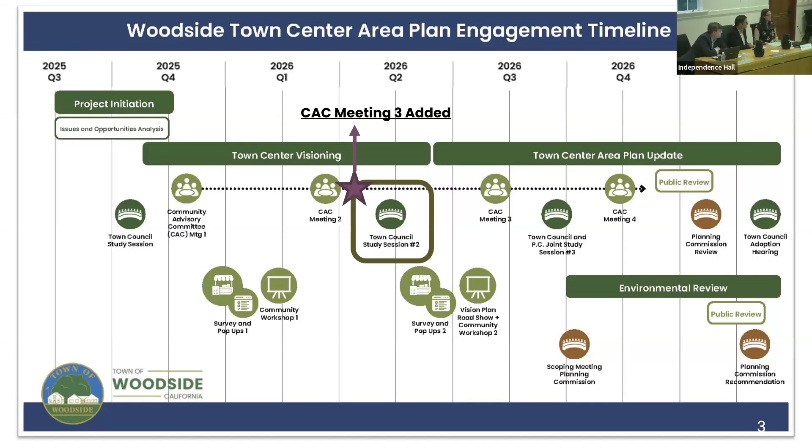So just quickly to start off, I'll lay out some of the policy context, just as a reminder that guides and informs our work on this update. And I'll restate some of the outcomes that we want to get out of this effort so that we're all moving in the same direction and aligned on what we want to achieve with this project.

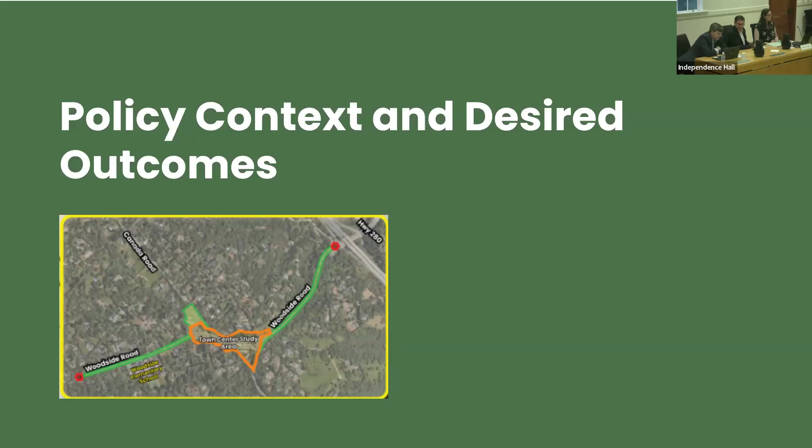Just as a reminder, you see here this image. At our first meeting, the council extended the boundary of the plan in both directions along Woodside Road from 280 on the eastern side all the way to Little Store on the western side. So that was one of the early moves by council to influence the direction of this plan.

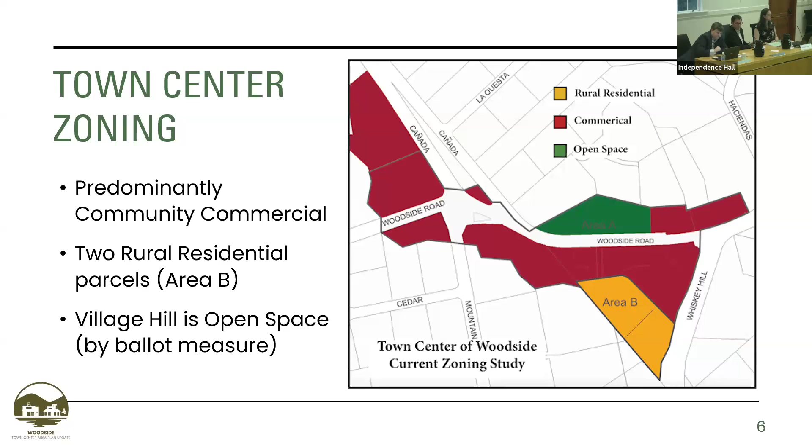Another important limitation that I think most of us are aware of, but it's worth restating, is Measure J, adopted in 1988, which limits building heights to 17 feet above the crown of the road within 100 feet from the edge of Woodside Road. You see that area represented in red here, and it covers essentially most of the privately owned portions of the town center.

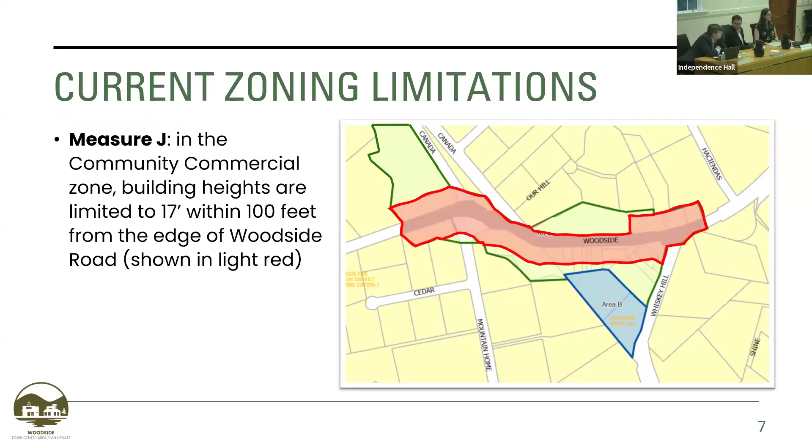Building consensus around a shared vision is very important to us, to come out of this effort with forward momentum around ideas we all agree on. Prioritizing the concerns of residents and local stakeholders over those of outside visitors, maintaining the rural, equestrian-centric, and small-town character—something that was repeated over and over through all of our engagement—and improving the safe movement through and around the town center for all different modes.

Facilitating seasonal outdoor dining, fostering a few additional public gathering spaces, improving the aesthetic appeal of the area, providing more guidance on the character and design we want to see in buildings in the town center, enabling the long-term economic success of local businesses, expanding the uses in the town center to better serve our needs, offering more flexibility to landowners, including exploring residential use, and finally enhancing the revenue generating capacity of the town center to help with the town's budget.

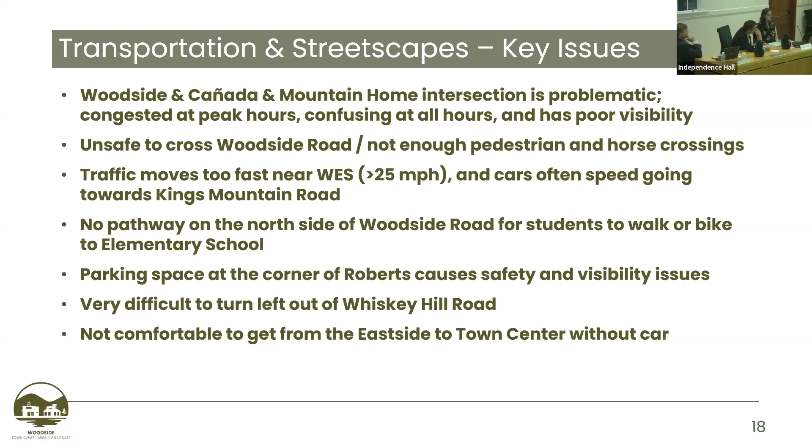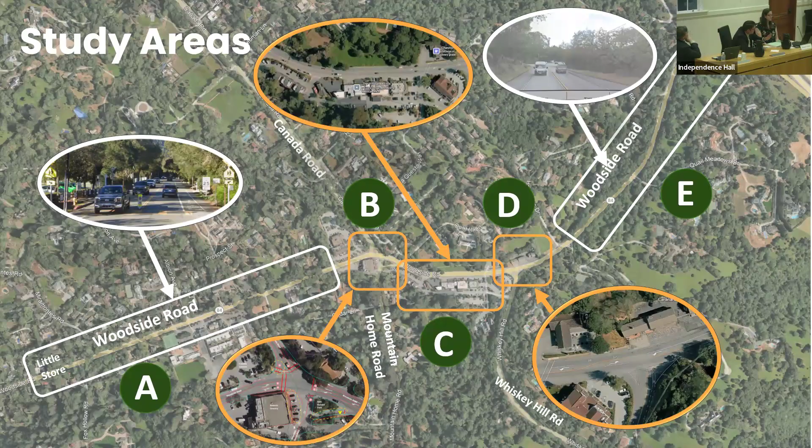So we organized our study areas from west to east, starting with Woodside Road from a little beyond Little Store into Roberts Grocery, then the intersection of Cañada and Woodside Road, then the central stretch of Woodside Road, the intersection at Whiskey Hill, and up to Woodside Road.

I was told you spent hours and hours poring over the slides, absorbing the concepts, so that I could be very brief tonight. So I will respect that and be very brief, and we can come back and have as much depth in the discussion as you would like.

So area A, which stretches from Little Store up to Robert's Grocery, has three concepts here, mostly to orient you to where these concepts happen. First is really, let's enhance the safety as much as possible around Woodside Elementary School.

The second concept looks at how we make the north side of Woodside Road more consistent, more pedestrian friendly, creating a pedestrian pathway on both sides, and also formalizing separated bike lanes on both sides of the travel lanes. There's a couple of spots where trees get in the way, but for the most part it's possible.

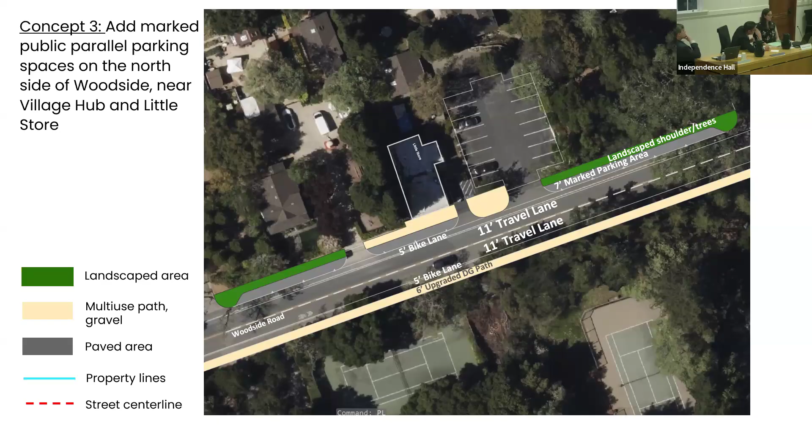So the CAC feedback was yes on concept one, as many traffic calming devices as we can do. The one thing not well received was speed bumps, but looking at speed tables carefully designed to take into consideration truck trailers, horse trailers and things like that is important. The north side multi-use path had support for the concept, but there's also acknowledgement that the drainage and irregular conditions there might make that very expensive and difficult to achieve, so looking at that block by block, but that was more lukewarm.

And concept three, getting absolute clarity on where you can park and where you can't, was well received. So I thought we'd stop there and hear your thoughts before we go into the next section.

Awesome. Thank you. Any questions from council on area A?

I'd like to understand what experience other communities you've worked with have had with changes pre- and post-implementation of programs in pedestrian and bicycle usage downtown or in the area you're working in. We have a lot of presumptions here that we're going to build all these bike paths and walking paths, and I'd like to understand how many people will really use those.

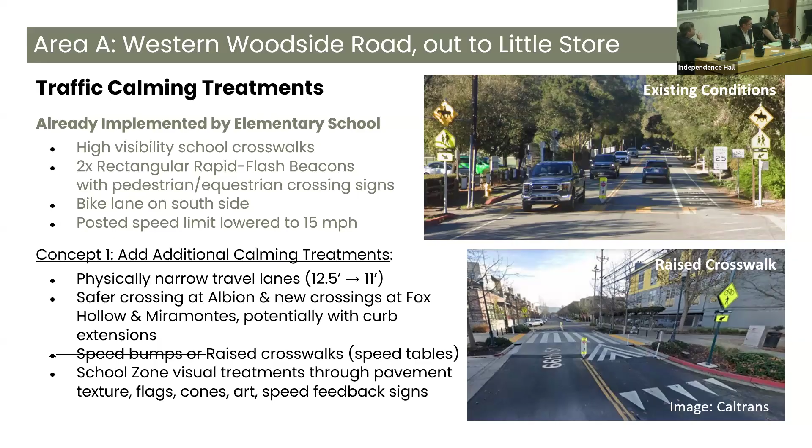I also had a question about Concept 2. It sounds like that was met with some lukewarm support, but some concerns about the cost. I think on one of the slides it indicated more diligence was needed, and I know the Circulation Committee has also looked into this and was doing more diligence on the costs. Is that diligence now being done, and is it being facilitated in any way by your firm?

That's not really in our scope to do that level of detail. I think what we can do is maybe take a stab at a high-level cost, but we're not going to be able to get in and do a level of detail analysis that you would need to really know tree by tree. But one of the recommendations that could come out of this effort is to do exactly that.

To do another, more detailed look at it. I think this process is more going to establish the policy direction of whether or not we want to do a certain facility intervention, in this case a trail or bike lane. So here we would establish the direction, and then there would be an additional effort to do some surveying, because it would require detailed looking at where property lines and utilities are. The utilities and drainage are where there would be some challenges, but we could come up with conceptual direction and design in this process, with follow-up needed.

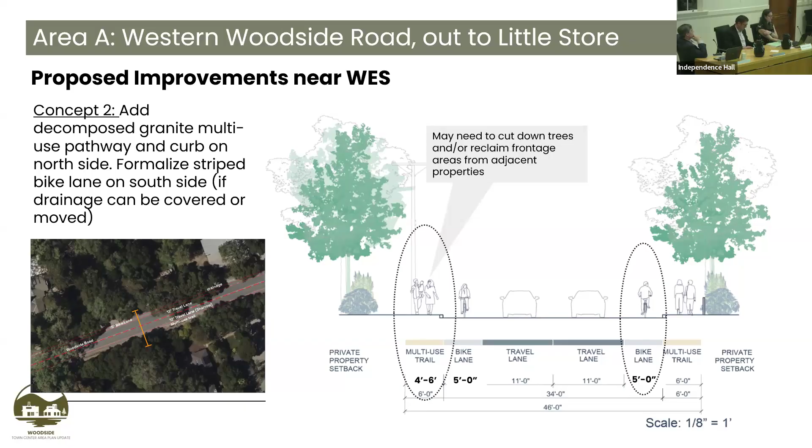Right, I think with that, we will open up public comment on Area A. Does anybody have a public comment that they would like to make on this issue? A lot of people are here for parking.

Hello, Steve Lubin. Surprise, surprise. I think really there's an issue of space. I think it would be great to have the sidewalk on the north side, but if there's enough room to put bike lanes on both sides, then I think it makes sense to put the sidewalks on both sides, but I'm not sure there is everywhere.

And I have, from at least the part from the school to Roberts, I think it's limited enough so that if you have good bike lanes, there just isn't enough room, and it takes actually less room to have a shared path, like Troy was talking about. That's a shared two-way path. The state and federal standard is 12 feet wide.

What we have there is 5 feet now. And so we end up with really a dangerous situation for kids, especially in the afternoon, heading from the school to the store. The kids will ride their bikes and come up to pedestrians and then veer out into the traffic. That isn't as dangerous eastbound because the cars are going slow. If that were replicated in the other direction, I think it would be really dangerous because the bicycles are going uphill and going slower.

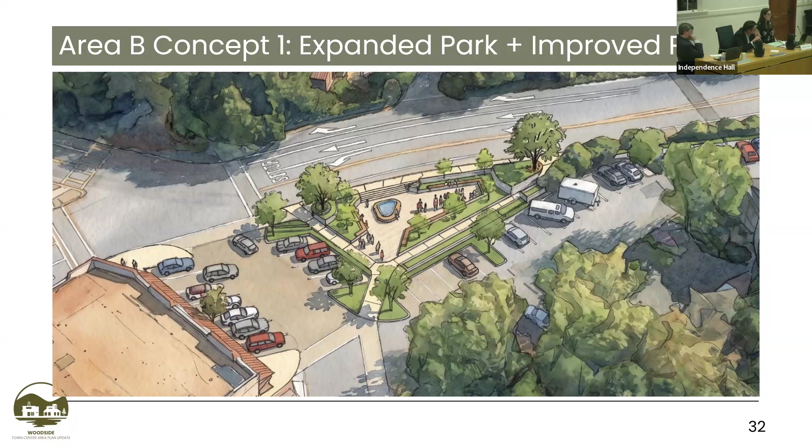Again, exploratory process. This was a concept where we relocated the on-street parking over to where Alec Donald Park is currently. So essentially moving the park next to Robert's Grocery and moving the parking over there. The idea was to have free flow of traffic, but of course, getting your carts and other things over there is extremely problematic. Next slide.

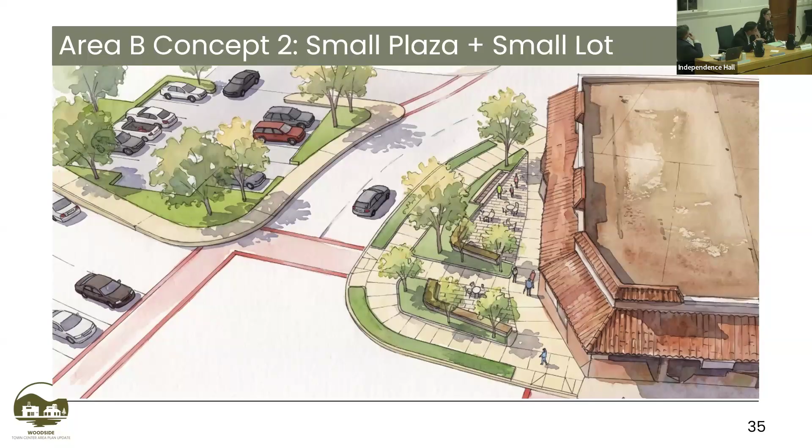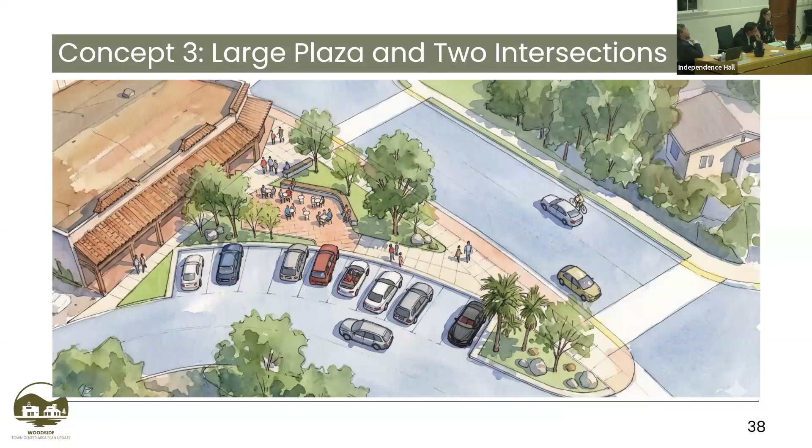This was the kind of out-of-the-box scheme, which was let's take the slip lane, turn that into two lanes of traffic, and create a second intersection. And that helped narrow up all the crossings where Woodside connects with Cañada, creating a three-way intersection rather than a four-way intersection. And then the parking would be on this new park in front of Robert's Grocery. Next slide. So these were the three initial concepts.

We had just a tiny bit of discussion for about an hour, and which was great, and I really appreciated everybody's feedback. And there were some brilliant new ideas that came to the table. And that's exactly what we were trying to do with this whole process.

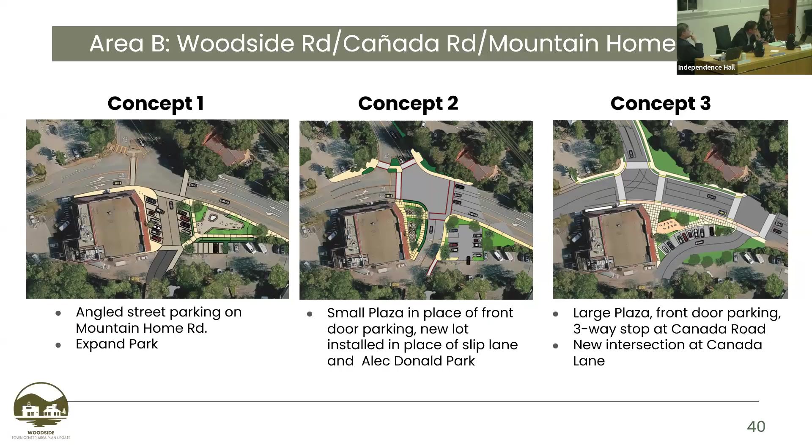So if you go to the next slide, there was interest in just saying, what is the absolute most minimum thing that we can do to improve driver safety, pedestrian safety, and enhance the crossing from the business district to the east to Robert's Grocery. And so the easiest simple move is to make some changes to the crosswalks. So you notice there where the slip lane enters Woodside Road, there's a well-defined pedestrian crossing, and then you walk along Woodside Road to another crosswalk that would extend over. And the idea that came from the CAC that was so interesting was rotating your existing crosswalk that goes over to the traffic triangle across Woodside, rotating it so that the cars are coming further forward so that they can actually see down Mountain Home rather than being tucked back behind Roberts Market as they are today. So that was a really interesting concept.

The other idea that came from that is your through and right turn lane is fairly wide. And if we could buy a couple feet out of that and create an 8-foot parallel parking along the north side of Robert's Grocery, and really formalize it with markings that people are familiar with for parallel parking, we could introduce a more customer-friendly parking area there. And then free up, eliminate the hard corner space so that we could create that landing for pedestrians and create those connecting crosswalks across Mountain Home and rotating the one coming down from Cañada Road.

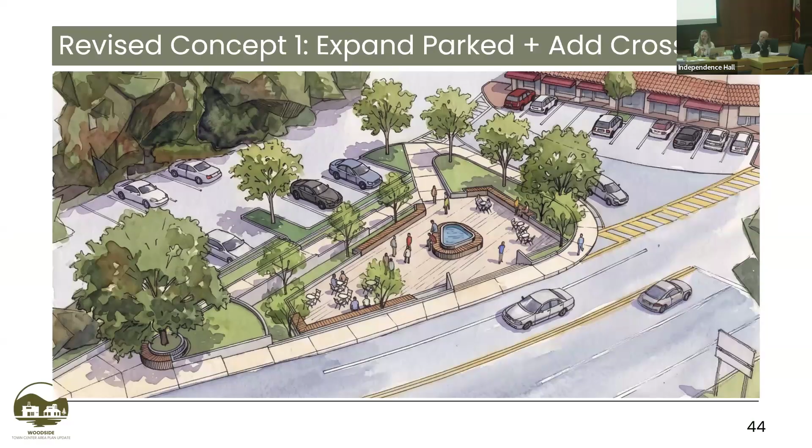Yeah, so if you go one slide back. So the feedback that we heard was, do not impact the parking as much, well, really at all, at Robert's Grocery, which is totally understandable. So our response to that was, let's take a little dimension out of Woodside Road on the north side of the store, which actually you can see in the plan if you go back one more. So you'll see kind of red, blue, and white cars that are right there. There's a strip of asphalt with a white line that looks kind of like a shoulder, or it's a little undefined the way it is now. Do you want to, I mean, is it possible to show us?

So essentially, you have a very wide through lane and right turn lane there. And so those 3 cars that we've drawn there represent, if you push that narrow zone to a standard 8 feet, and you put that striping in there, that clearly makes it parallel parking that people recognize or are familiar with.

It relieves the impact of removing that space that we had to eliminate to make those crosswalks feasible. So we don't want to have a negative impact on the business or people's convenience of using the business.

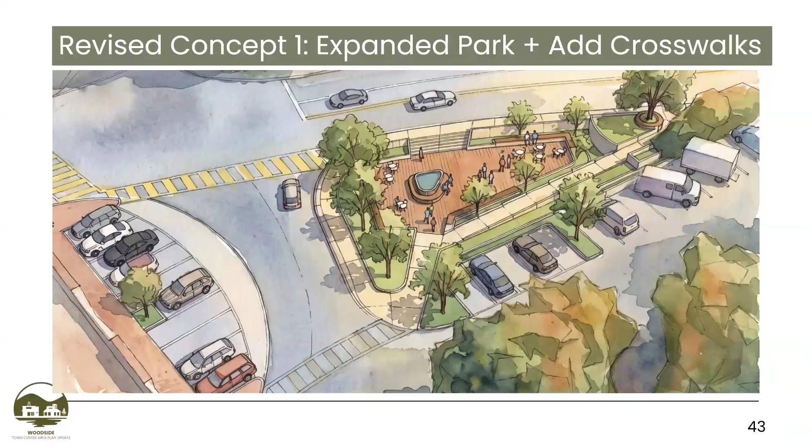Okay, we will close public comment and move on to council deliberations for any direction that anyone feels strongly about. I'll open it up. Yes, sir.

And it's really simple. I'd like to see the committee put a priority on how to add parking spaces as opposed to taking them away from the existing businesses downtown. We've spent a lot of time, put a lot of effort into designing great walkways, pathways, roadways, but it's usually at the expense of parking. I want to say, let's start with parking. That's what our businesses start with and end with. If they don't have it, they're not going to survive. So we really need to think hard about how we enhance parking downtown, not take away parking spaces.

Okay. Thank you. Yes, Councilmember Wall. Just ask two questions for clarification, if that's okay.

In concept one, I just want to make sure my understanding is correct. Is it correct that the one parking spot that is considered dangerous, that one right there, that parking spot would be eliminated in this concept, but that 5 additional spaces would be added?

It's replaced. So, Troy, if you mark the corner, you see that crosswalk, where that crosswalk is landing, that's crossing Woodside Road. That's a new location for that crosswalk. We're shifting it forward, which gives you better sight lines.

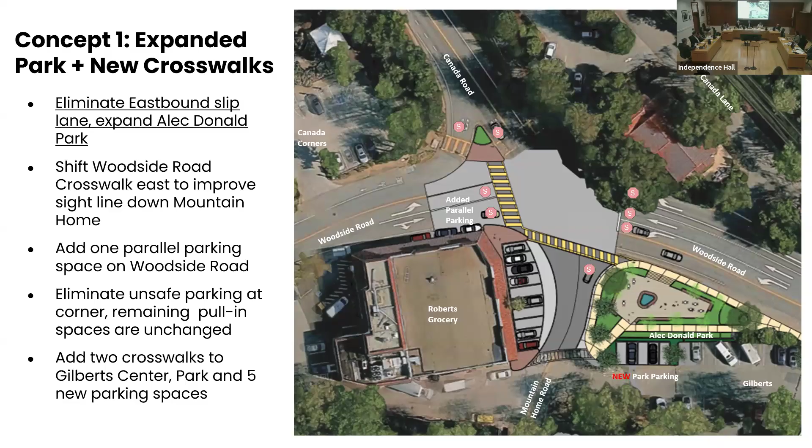I'll jump in and say I'm back at concept 0, just because we don't have property owner buy-in. It's very pretty, but it's not that functional, unfortunately. And the financial hardship aspect of it is a good part of the equation.

I agree with Councilmember Brown. Maybe there are different things to look at. I hate to say Alec Donald Park doesn't have a role anymore, but maybe you could put parking there, parallel parking along Mountain Home Road, a couple of spots, or carve it up. I don't know, I have to think about that.

The only other thing on my mind, besides advocating for what I think I've heard, is that we should slow down, that concept 0 is reasonable, that we need to respect these businesses first and foremost, and they drive this process, in my own opinion.

And then a message back to the CAC - anyone saying that parking is for us and not for others, that we're not a provincial island, that we are part of a larger community, and that our businesses require, for their economic well-being, a very welcoming environment. Certainly our peers in other communities do not have that attitude towards us when we park to go shopping in their neighborhoods. I just want to make that point.

But I'm a concept 0 person for now, because what I've heard is that the function we have working is required. Maybe there's another iteration, or two, three, or four still to come. But in my opinion, there's enough pushback to say, unfortunately, it's a beautiful design, but not where it needs to be right now.

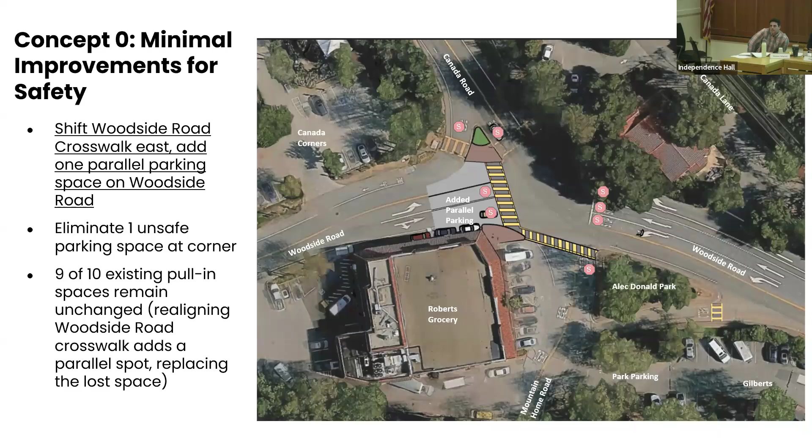I liked all the designs personally. I was kind of sad to see that 3 wasn't popular. It made sense to me to have more seating right outside of Roberts so people could buy stuff and eat. But maybe not, since it's parking on public property - it's not even my parking anymore, which I understand.

One, I think, is a net even for parking for Roberts - it adds some spots, that makes sense to me. Having worked through undergrad, putting myself through school delivering food and driving large trucks, I can assure you that if there's a need, you can always find a way. Even if that means parking across the street, not the most convenient, but delivery drivers can figure out a way if they're creative, as I always was.

Making that turn, okay yeah, so we're just gonna do deliberation. I'm not trying to engage with anybody. We're gonna just deliberate and make a call here.

I appreciate that we need company buy-in from Christine, Roberts, and Leanne. I absolutely agree. I just want to make sure we're not throwing away good ideas based on issues that aren't going to be there. If part of the issue is creating a competing market, like a farmers market, I think that could be worked out - if there's interest and people are open to it, ensuring that's not going to happen, we could have some kind of public area where we're not going to have a farmers market.

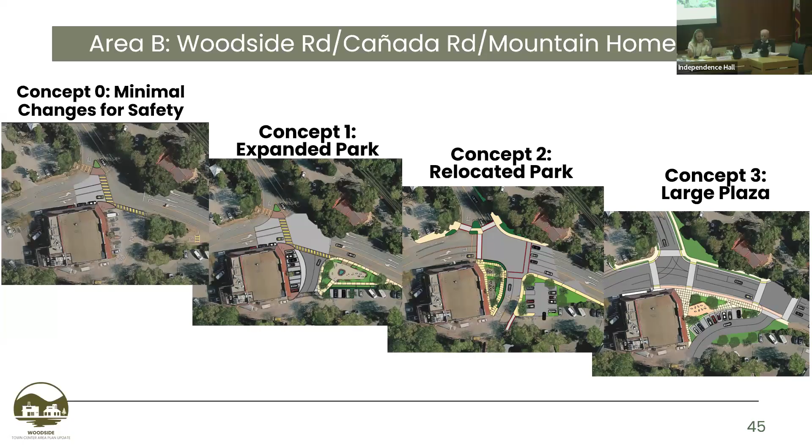And so I think there's some good ideas in concept one. I would also note that I think the slides indicated that concept one had the majority support from the Citizen Advisory Committee. I think business owner buy-in is really important, but so is resident buy-in. There's lots of competing concerns here, so we have to try our best to bring all of those together.

I like the fact that concept one does try to address the community desire for a public gathering space. I think I tend to like the idea of expanding that park. I could imagine kids eating there after school, or residents getting a sandwich and having a place to eat. I don't know that is the community gathering space that I envisioned coming out of this process.

I'd like to see what other ideas there are for community gathering spaces, because in my mind, having some additional community gathering spaces is a key aspect of the town center area plan. And we haven't, you know, I want to know more about what's proposed. I think concept two definitely creates better pedestrian crossings, which I think is a really needed improvement.

I liked the idea of having a key arrival moment in Woodside. So I think more work is needed. My policy direction would be to send this back to the Community Advisory Committee, talk more. Let's see if we can bridge the gap between what the advisory committee is expressing that the residents' desire, the gap that we're hearing from the business owners. So I think we need to keep exploring this. So that would be my advice to our consultant.

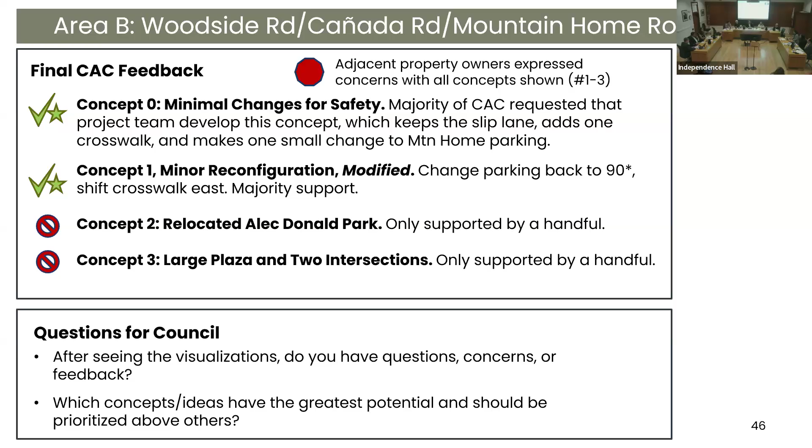None. Okay, Central Woodside Road. Currently, walking from the east to the west end, or either way, requires a lot of intermittent kind of steps. It's not a totally obvious or continuous sidewalk. There are some barriers—if you're local, you're going to know it and you're going to do it, but it might not be the best possible streetscape that's out there.

So this is something we heard from the community, so we wanted to put some ideas out there. If you go to the next slide—one of the key issues is we can't do anything until the private landowners decide to redevelop. So the option we wanted to put on the table was, could they redevelop without pull-in, 90-degree pull-in parking, if they wanted more development capacity out of their site?

We got a lot of great comments from the CAC about challenges with redeveloping very small parcels and the costs that come with that, and the challenges economically and feasibility. So I won't speak to that, but that's out there.

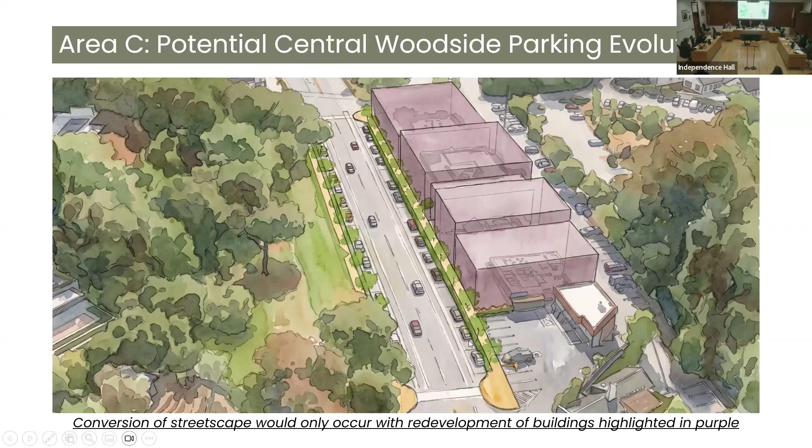But in the case that there is redevelopment and the landowner is interested, how would you coordinate that? We put together this concept where, gradually over a very long time, the street could evolve into a sidewalk, essentially extending. There's one instance where this has happened—you see it right in the foreground. Can you scratch on that? So basically taking that sidewalk and extending it eastward. Next slide.

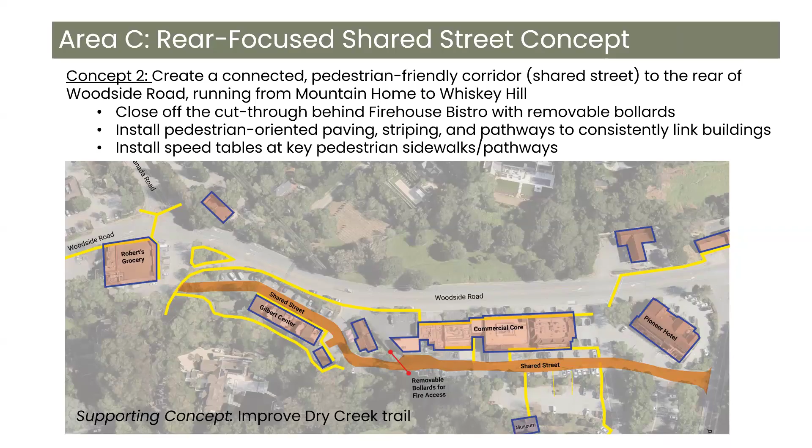Thank you. Any other public comments on Area C? All right, hearing none, we'll close public comment, move on to deliberations or any direction based on this page. Anyone?

I kind of like the idea of the walking space. But I'd like to understand more about how it works elsewhere in terms of encouraging pedestrian parking or pedestrian use, as well as that it does not discourage parking. You're saying you like the shared road concept in the back? Yeah, I kind of like the look of it. Yep. Okay.

As far, I think concept two is essentially turning black pavement into pavers. Yeah, it's aesthetic, it's not much more complicated. No, you could have lights and stuff, but it's not magic. It's minimal. Yeah, I'm with that one. Okay.

I think concept two is a super cool idea. I have thought a lot about that area and how it could be improved and never thought of that. So I think it's a great idea. I think in a way it could kind of create a community space. You could imagine people going to the pub and being able to walk to the Pioneer. So I think it's a really great idea. I love that the majority of the community advisory committee supported it.

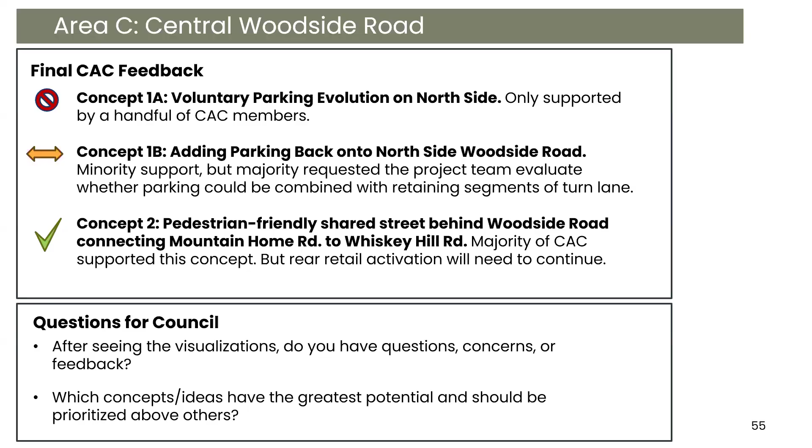Great, all right. I think you've got the direction, although I think we need a little follow-up on if the pad still exists or not. So I'm looking out at Gene, but another time, not for tonight. But okay, so just to be clear, the direction is to keep considering all the ideas here, or just two? Only two, so we're going to take the other two off the table. Okay. Onward and upward, I think we can still do it.

Okay, Whiskey Hill Road and Woodside Road, Area D. The community feedback we heard is that it's very difficult to make a left turn off Whiskey Hill onto Woodside. The other concern was that traffic doesn't tend to slow down until they reach the Cañada intersection. So how do we make Woodside Road slower and safer? And then how do we make that left turn not so difficult. Next slide.

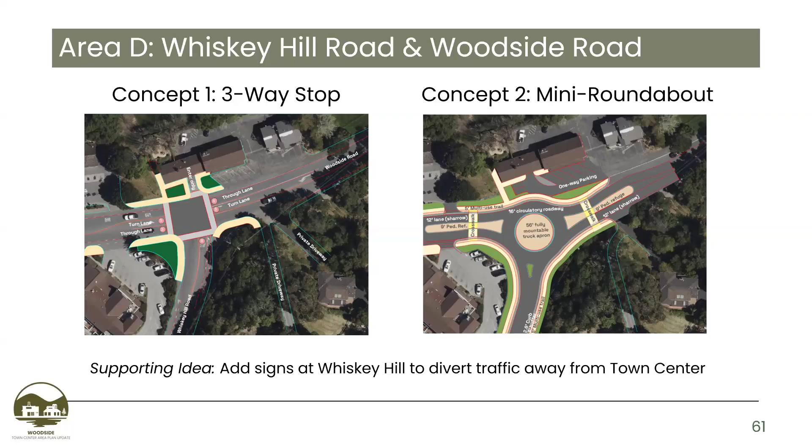The response that we got was interesting because it led to the next concept, which is something the circulation committee is already working on. This really stemmed from concerns about congestion, that the time to travel from one side of Woodside to the other gets pretty strenuous during commute peaks.

It doesn't necessarily address the lowering of vehicle speeds into Woodside, but it does at least address half the issues, which was making a left off Whiskey Hill.

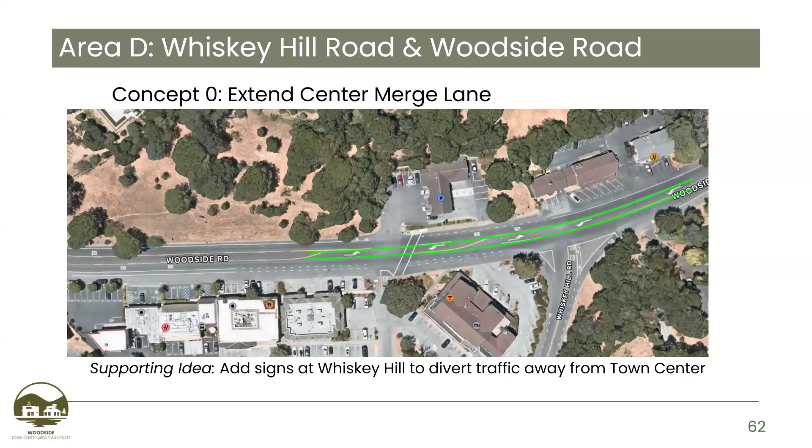Might go fast, they're consistent. Any questions?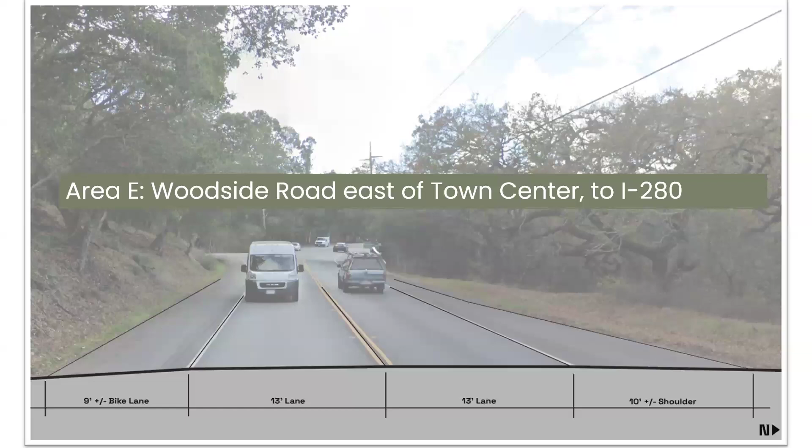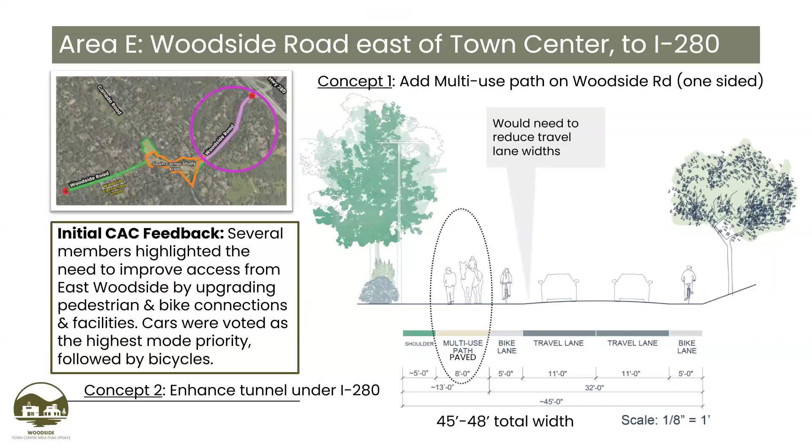Next slide. So the issue here is creating a multi-use paved path. And then the second issue was whether we promote use of the tunnel, or how we promote use of the tunnel to the east side of Woodside. Next slide.

So the multi-use path on the north side was supported by the majority of the CAC. The south side is very difficult due to a lot of variable shoulder conditions. So on the north side, the challenge is we need to meaningfully connect it to the multimodal underpass, and just get across Woodside Road safely. Concept 2 was the open tunnel under I-280. It's currently open, but it could use some enhancement to make it more attractive for use and more intentional trail access. Apparently it's quite difficult to get to, or just not inviting at all. So minority support generally, but strong support from Woodside Hills residents.

Great, okay, any additional questions on this? All right, any comments from the public? Hi, welcome, Mr. Drucker.

So because some of this probably came from me, and we were in the same place as you are, super late at night and everybody's tired. We were in the same place as you guys are tonight on Monday when we discussed this. Everybody's super tired. So to put a point on it, there was super strong support from Woodside Heights and Woodside Hills residents for the path along Woodside Road, connecting from the path that's getting built right now that Lewis is working on, right? So we have a path coming from the high school to 280. Let's please extend that from 280 to Town Center. You had very strong support for that in the CAC and from those residents.

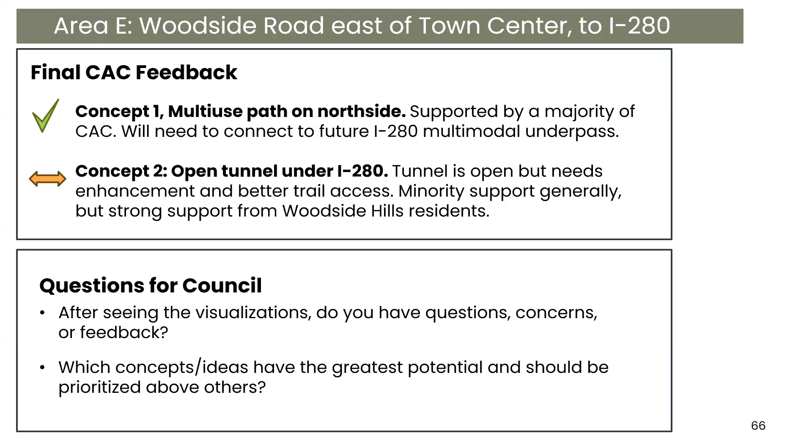Thank you. Is there any other direction you need from us tonight? We have a break, but we still have parking, land use, and public space. They are, however, much shorter. We only have one brief discussion point for each of those topics.

Yeah, we're going to continue. That's a good call—are you guys okay continuing, or continuation to another meeting? I'm supportive of continuing, keep going. No, do you mean continuing now or continuation to another time? Continuation to another time. Okay, yeah, I prefer to go to another time. We're going to continue this meeting to another moment. But thank you so much. It's like we tell our kids, no good decisions happen after 10 p.m.

Okay, very good, thank you so much. Very great job, guys. Seriously, thanks guys, very impressive stuff.

All right, all we've got left is reports. So any volunteer committee reports? Just a reminder that the May Day Fun Run pre-registration closes this Thursday evening for Saturday's event, and we highly urge everybody to pre-register so the morning of isn't as crazy.

I have one announcement. I was elected vice chair of the San Francisco Airport community roundtable that we participate in. They actually wanted me to be chair, but in keeping with tradition, I broke the tradition. The interesting thing, and this might be controversial, is I don't hear a whole lot from our constituents and citizens about airport noise. I'm not saying we don't have it, and I'm not saying it doesn't exist—there are people who complain about it—but this isn't Millbrae or South San Francisco or other cities that just live with this stuff and can't sleep at night.